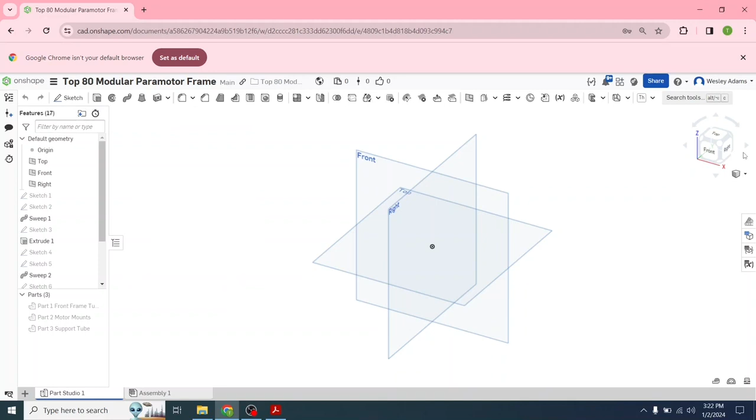Let's create the side base tube. It's a very similar process that we've already used, so this will give further repetition. Let's go to top view, sketch, left click on top view, left click center point.

Circle, left click once you highlight in the center, drag that out, left click on the dimension tool, left click on the edge here of the circle, the diameter of the circle, and that's going to be 0.73. Hit enter.

We'll close that out. We're going to go to front view. Left click on the sketch, left click on the front view, left click on the line tool, highlight the center of the front plane, left click and drag up, left click, drag away, hit escape to deactivate that new line that was forming, and left click on the dimension tool, left click on that line, drag that out.

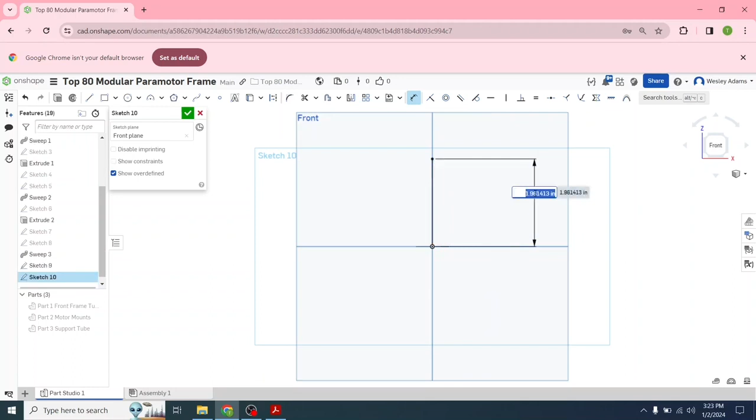We're going to go 8 inches here, and then click on the plus sign. I'm going to go to isometric view just to see that better.

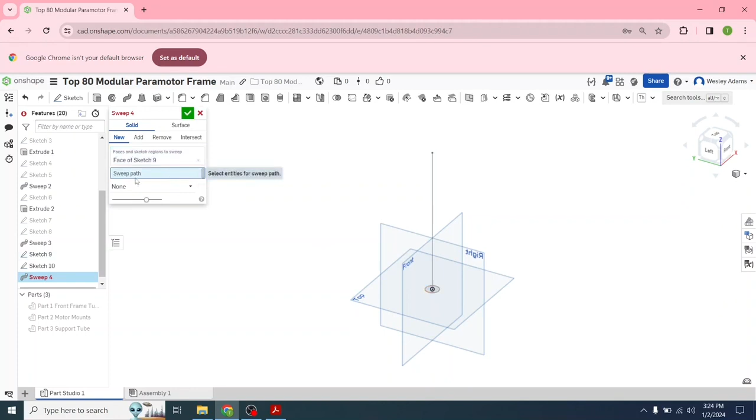I'm going to go to sweep, left click on the sweep tool, solid, new, faces to sweep will be the diameter of the circle we created. Left click on sweep path, it'll turn blue. Left click on the line. Now we've just created that tube. Left click on the check mark.

Go back to front view. That should be 8 inches. This is going to be the bottom of the base, connecting the back frame to the front frame. So right click where it says part 4. Let's go rename. We're going to do side base tube.

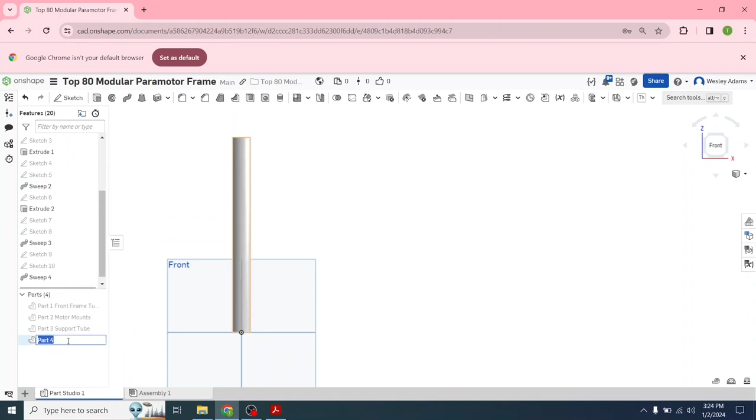That was part 4. Let's right click on it, edit appearance. Let's change it to an orange color. And I'm going to turn that off because we're going to create another part.

Actually, let's go to top view. Left click on sketch, left click on top view, left click center point circle, highlight the center of the plane, left click, drag that out.

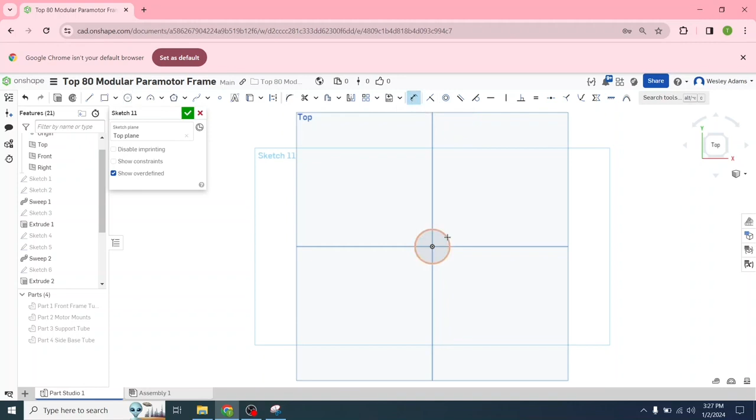Go up, left click on the dimension tool, left click, drag away, left click again, 0.73, hit enter. Now we've got the diameter of the tube. Left click on the check mark, that goes away.

Let's go to front view. Let's go left click on the sketch, left click front view, left click on the line tool. We're going to hover over the center. We're going to left click, drag that up. Let's just go about an inch.

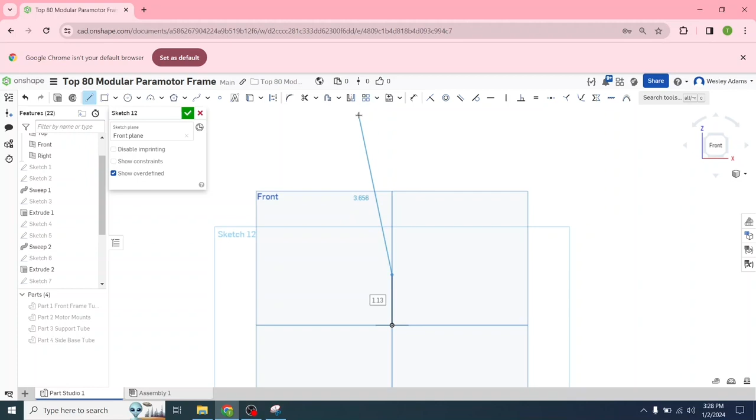Left click, and then drag that away. I'm going to go at close to the angle I'm going to need. Left click again. That is definitely not the length I need. And then left click. Hit escape.

All right, let's go to the dimension tool. This one is going to be 2 inches. And now we're going to go left click here. This is going to be 34.

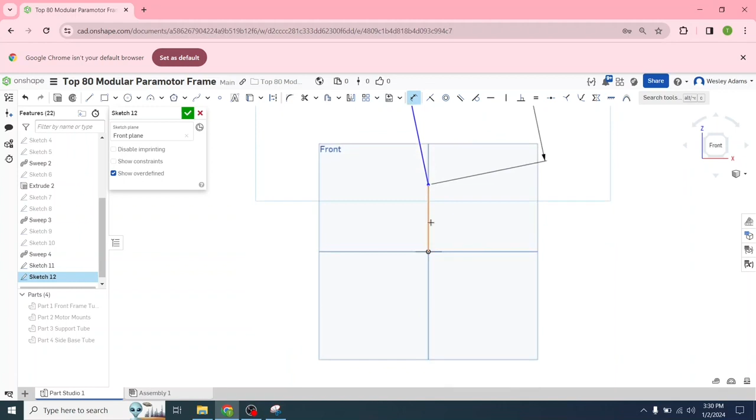We're going to come down here. We're going to left click on this. 3.3. I know these seem like odd numbers, but I've already tested this.

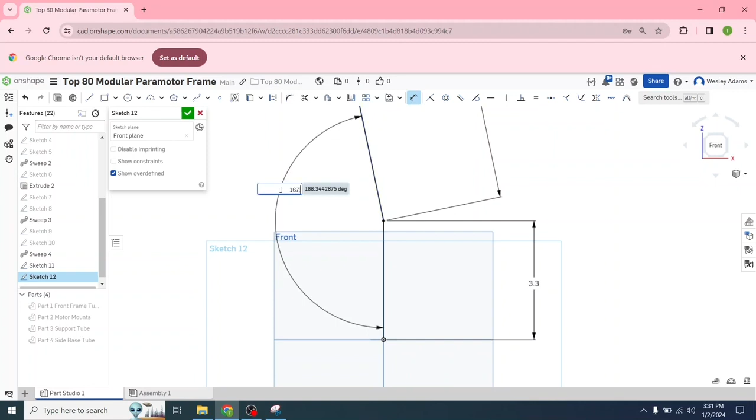Let's go left click here on this line. Left click on this one. We're going to go 167.3. Hit enter. Let's scroll out.

We're going to go left click on this line, left click on that one. And this is going to be 102.7. Scroll in so you can see what I'm doing.

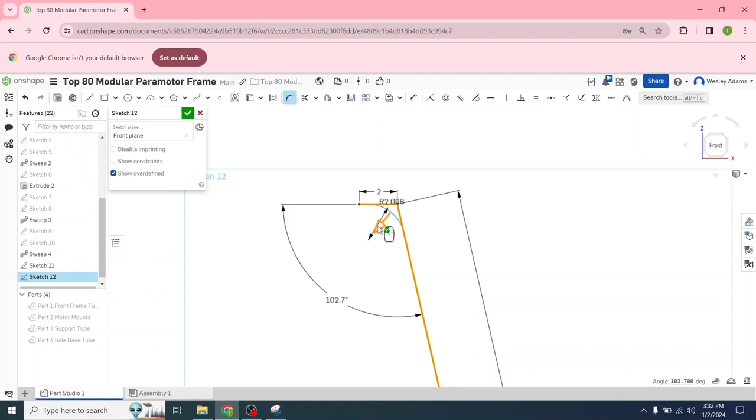So this is sketch fillet. Left click on that. Left click on this line. Left click on this one. And we want an R of 1. Hit enter. There it is.

I'm going to drag that out so it's a little easier to see what I'm talking about. I'm going to go down and do the same thing here. So I'm going to go left click on this. Left click on that. R1. It's just what we had on the last one.

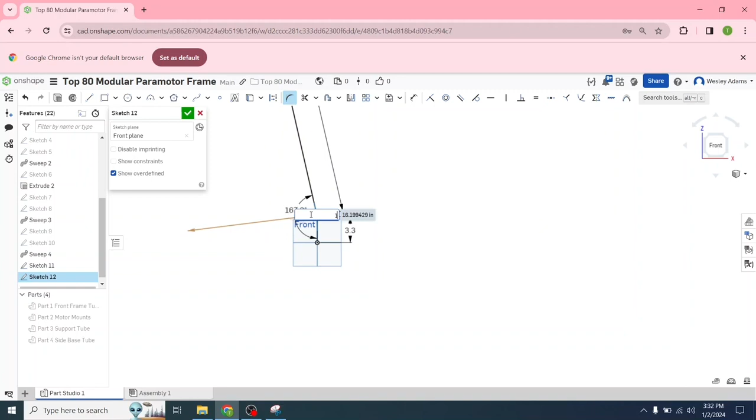Double click on that, hit a 1. There we go. And now I'm going to drag that R out, so that's the radius of the bend there.

Good, and we're going to sweep this like we've done before, but now we have more segments. It's real easy to miss one. So let's left click on the sweep tool, left click on the diameter of the circle we need. Now swept path. This is where people can mess up.

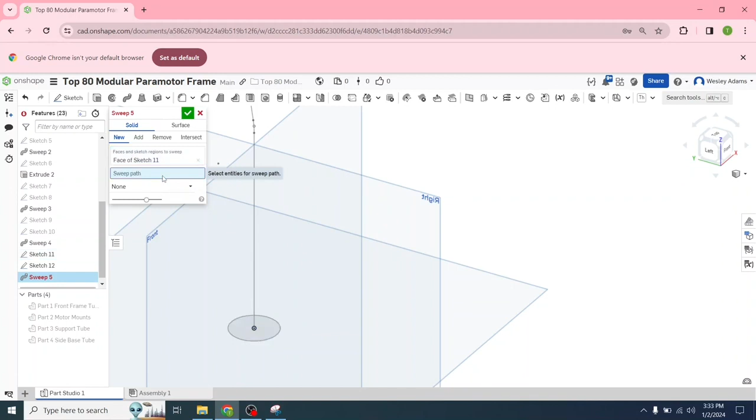Left click on that until it turns blue. Left click here. Left click on that smaller segment. That's where the radius of the bend is. Left click there. I'm going to scroll out and drag down. Got to make sure we select all of our bends.

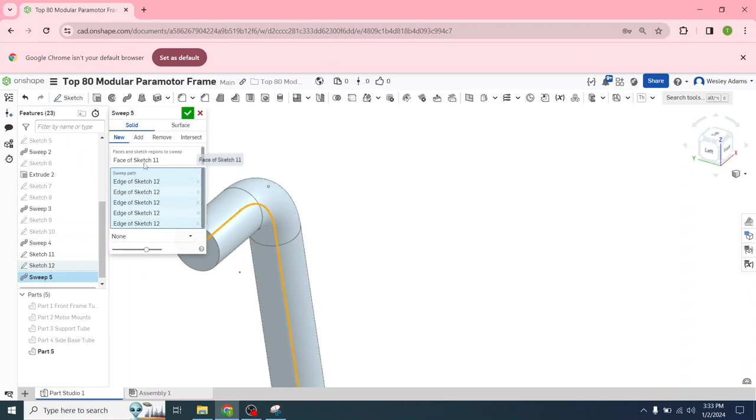There we go. Solid new. And now we can close that out. Let's go back to front view and look at that. There's our part. All right, so that's part 5.

Let's right click, let's rename, and let's call that the back frame tube. Let's go back and change our color again. We really don't need those to be different colors.

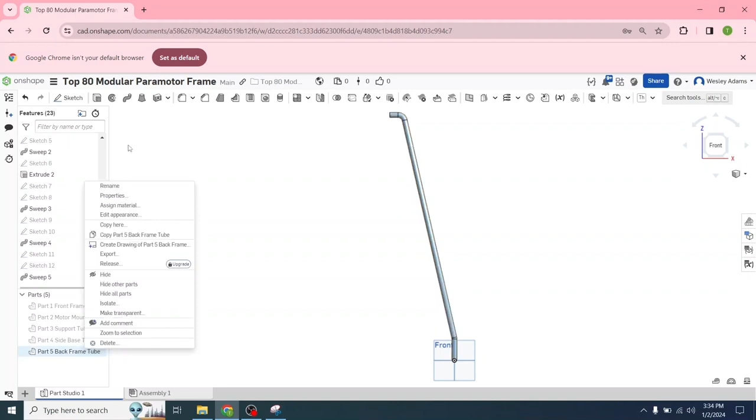We'll do that to the other parts. These will not be hard to distinguish between. So let's give them all a silver color because they're going to be aluminum. So let's go Edit Appearance, Silver. Close that out. Right click on this one, Edit Appearance.

That's given us 5 parts. We're going to stop this video here so that it's not too long.